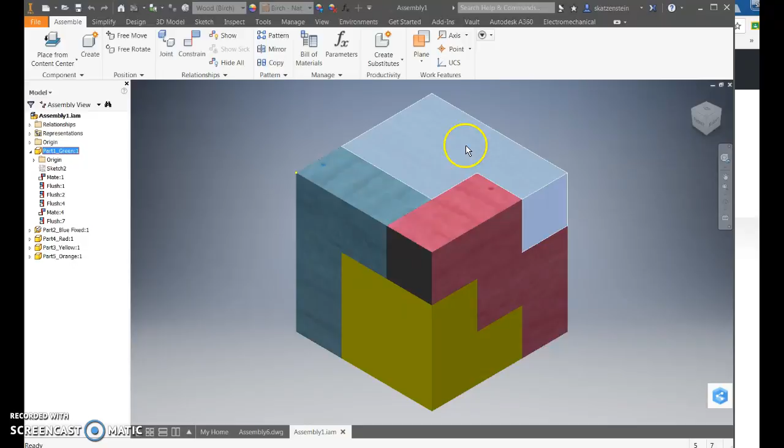To get started, you need to make sure you have completed assembling your puzzle cube and have a .iam file. Your puzzle cube is locked down and all the pieces are fully constrained and can no longer move outside of this assembly. So if your puzzle cube is complete and all pieces are constrained, you are ready to make a drawing.

To make the drawing, I highly recommend that you set up your puzzle cube to be in an isometric view when you save it as an assembly. To do that, you just click on a corner and make sure you're at a top, front, and right view.

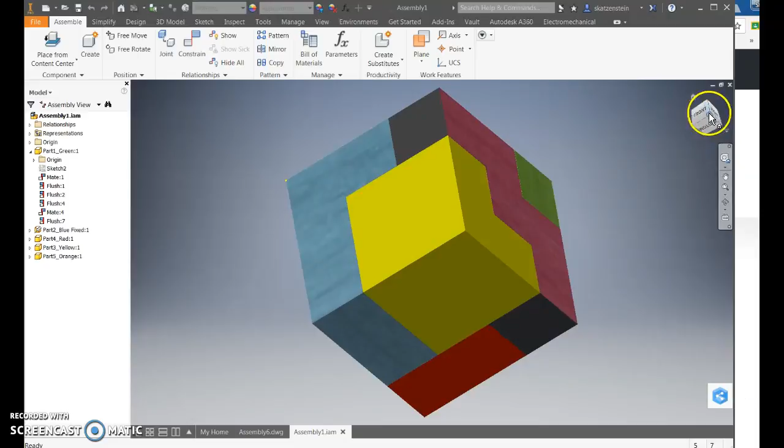You can go up to the home button here. Whoops, I already saved it there. Let's redo that. Click on a corner. Nope, I have the bottom view. I don't want that, so I'm going to bring it down to a top, front, and right view. Only I'm going to show you how to do it in case yours is not set up. Let's try this orientation. There we go.

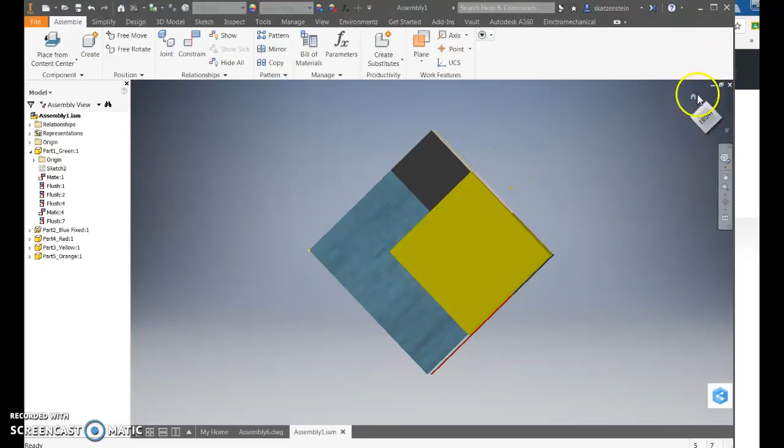We've got a top, a front, and a right, but that is not what my navigation cube says, but we can set it so it does. I like to go to the home button and right click this time, and say set current view as home and fit to view. Make sure you're on that view, then click. What that does is if you rotate your cube and want to get back to that view, you just click on the little house and it's back to home.

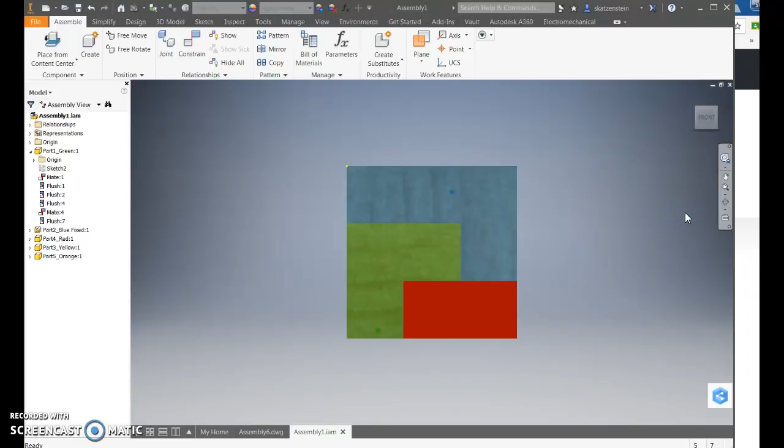However, the labels on our views are not matching the navigation cube, but you can reset those. I'm going to click over here where it should be the front view, right click it and say set current view as front. When I do that, it's now labeled as the front view. Go back to home and you see the top and the right views are also labeled. This is very important when we set up our drawing.

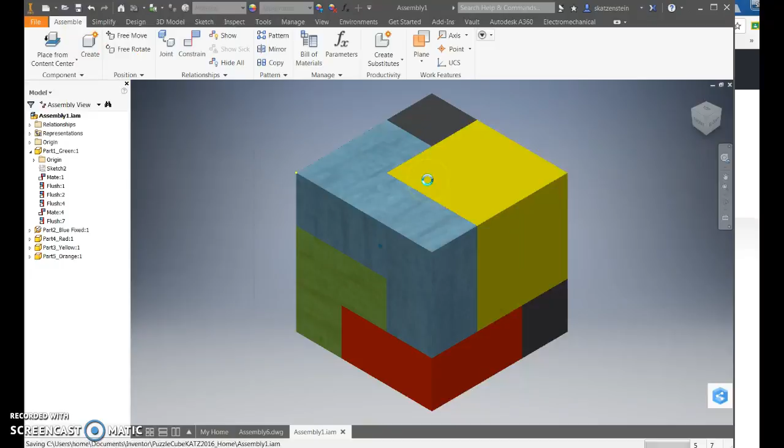It will help you get the 2 isometric views of all 6 faces. Now I'm going to save this, and yes, save all the dependents. And now we can go start a drawing.

So you're going to go to your home screen and new drawing. Real quick review, we need to change the page size. So you are going to edit sheet 1 and change the size to A.

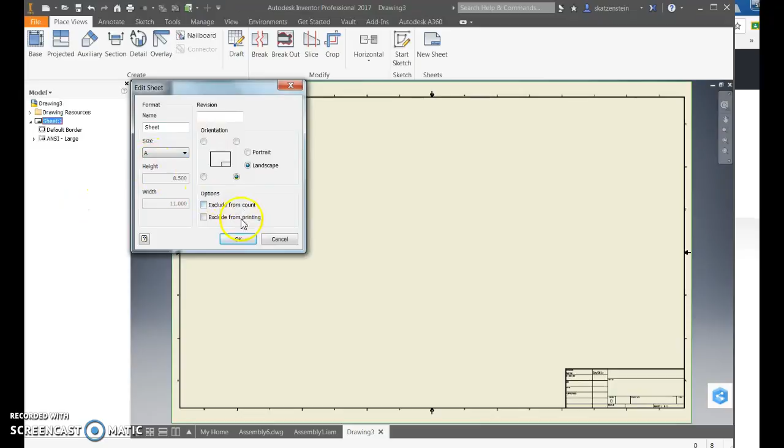You are also going to delete the extra large title block and insert, under drawing resources, under title blocks, the regular size A title block, and insert. There you go. Now you have room to insert your cubes.

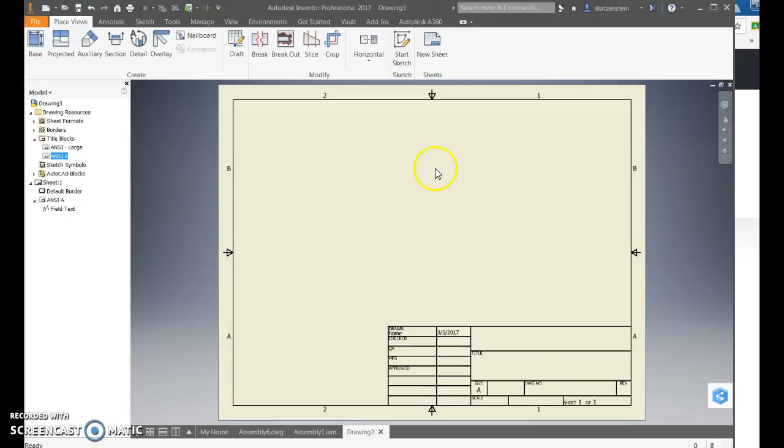To place the cubes, it's the same technique. You go to base, find your file in the file menu, and there's my assembly. I'm going to open that one and place the first view kind of on the left side of the page.

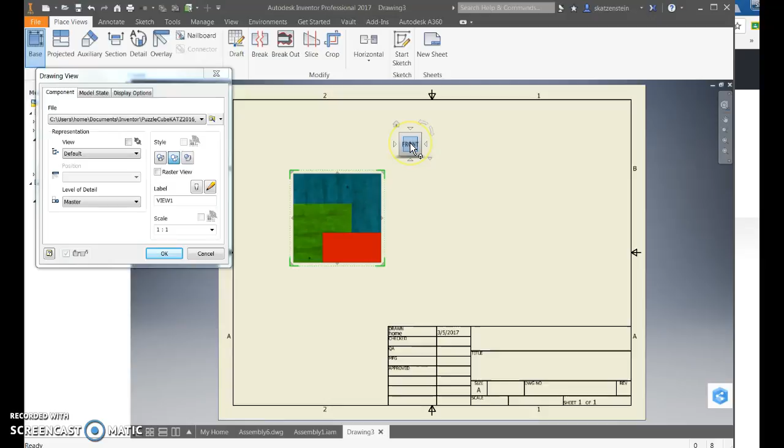I like the 1-to-1 ratio size. We need an isometric view, so over here there's our navigation cube. All I need to do is click home because I saved it in a top, front, right isometric. For some reason it changed the scale, so I'm going to go back to 1-to-1, make it nice and large.

Then I'm going to make sure it's going to be colored - this is the button that says it's going to be shaded or colored - and it's selected, and then I'm going to say OK. The first view is set down.

To do a second view, go back to base. We're going to locate it over here on the right. You can move it to the ISO view for home, but you don't want to repeat that home view, so I'm going to bring it back to 1-to-1.

We need to get it so it's not showing the top, front, right. We need to show the bottom, left, back. So I like to click on the bottom corner here in the front, and that'll bring up the bottom view. Then I rotate corners until I get it saying left and back. Now I've got the bottom, left, and back - these are the other 3 sides we couldn't see before.

I am going to make sure I am colored, 1-to-1 ratio, it's in a good spot, and say OK. We placed it down.

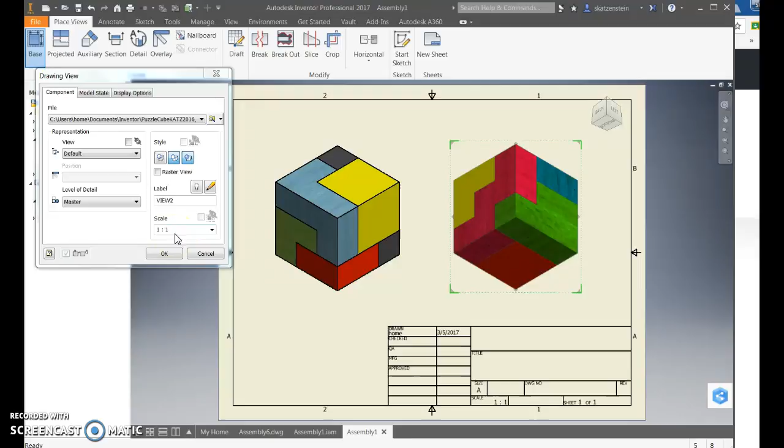Very good. The last details you need to make sure you have are your name and the title. To do that, you have an I button, or in the new 2017, they've added the file selection. You bring down the I button or the file menu and find iProperties. In the summary tab up here at the top, you can say Puzzle Cube Assembly.

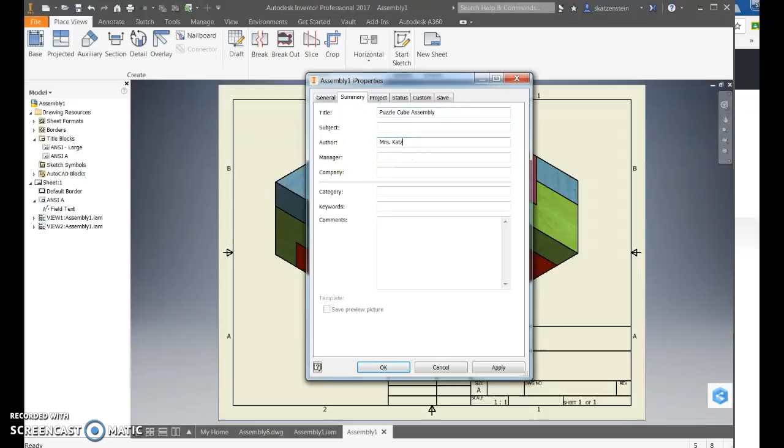This is showing your puzzle cube assembly, and don't forget your name. Alright, and that will go in your portfolio.

So be sure to save this as a drawing file. Just hit save, give it a name. I've done a couple assemblies today, so there's a name. It's going to be a .dwg file, so it can be read in Inventor. Saved. Yes, you want to save all the dependents.

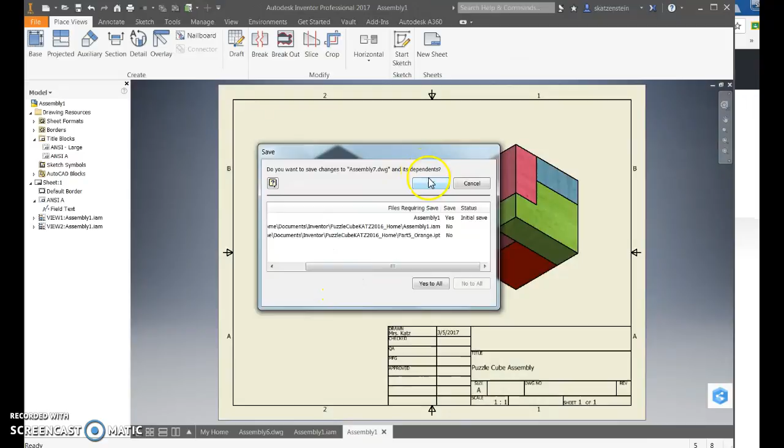Yes. And then to put it in your portfolio, go to your I button, or here in 2017 it's the file, and you need to save a copy as. So over at Save As, save a copy as, and you can leave the same name but now change it to a photo or picture file, .jpg, and save that.

And that .jpg file is the one you are going to find and upload and put into your portfolio to show that you have assembled your cube. And you are done with that. Good job.